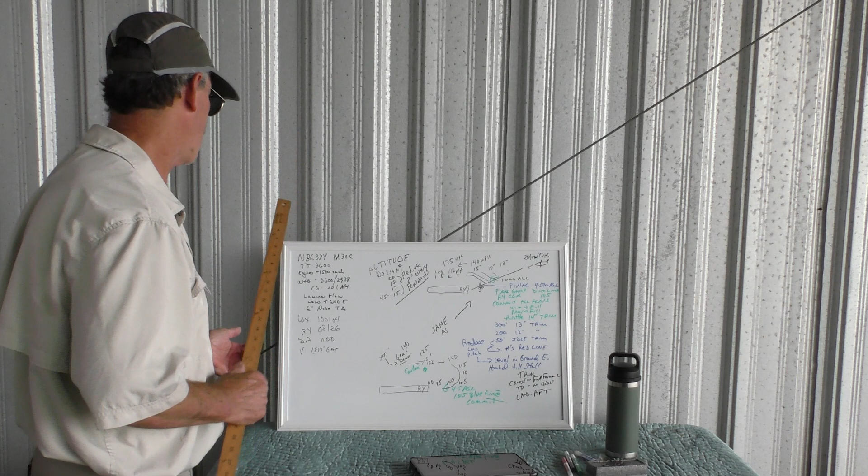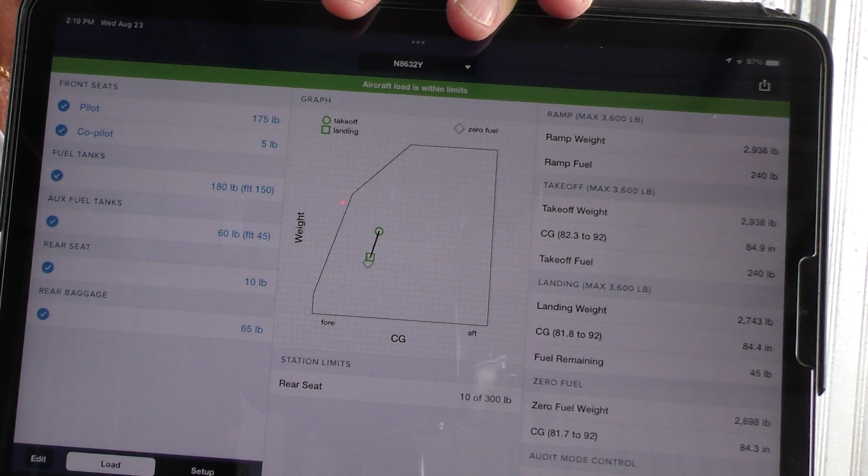The weight and balance, for others that might be interested: my weight, I should have it listed here, 2445 at 82 point something CG is my aircraft. After any major work, I reweigh it. So this is, if we can see on this screen, where I am. I am in the forward 20% of that envelope. So therefore, I am very light because I am 2,938 pounds out of 3,600. I'm over 600 under gross.

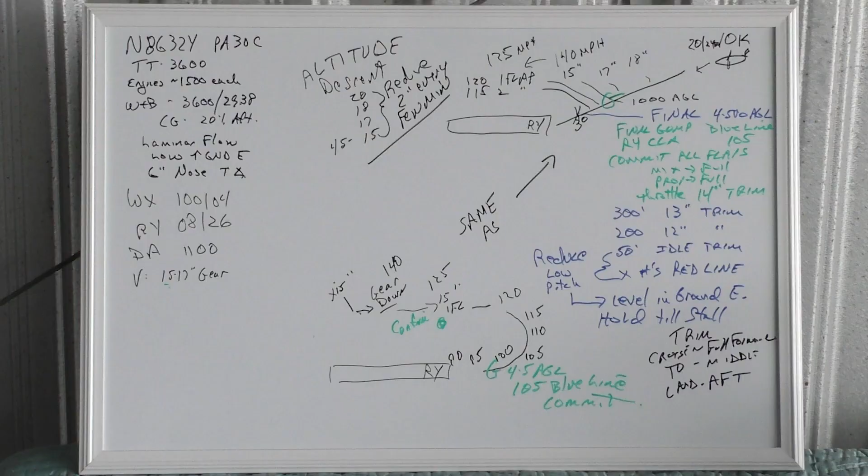I will have to be thinking on my approach on what am I going to do. This is going to help me point. I'm going to move us a little closer. There you go. Okay, I'm back.

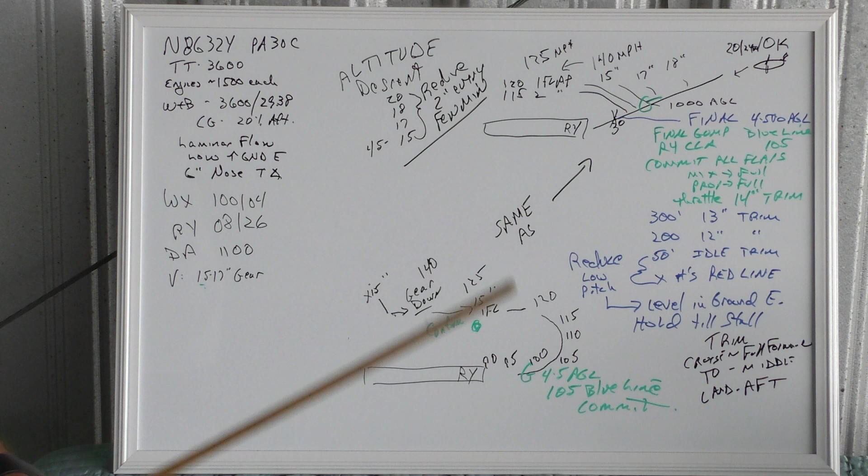I put my ideas down and then we're going to go fly, and hopefully I can demonstrate what I'm trying to talk about. But you have to plan ahead of time. I start off with the weight and balance and how I configure the plane. I also have to understand my wing design and ground effect. This is a laminar flow wing. It is low to the ground, and I will float, especially if I'm light. That's where people get the difficulty, so they will not use flaps, whereas I'd rather use flaps and land extra slow when my stall horn goes off.

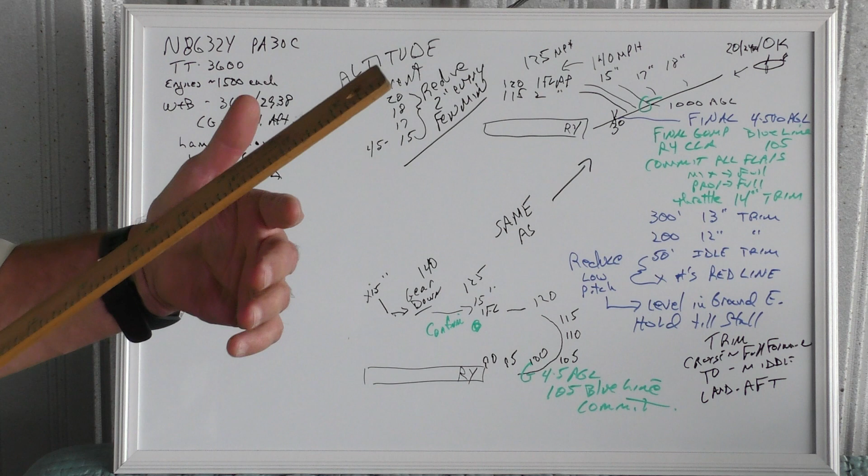The 6-inch nose wheel versus the 4-inch nose wheel also makes a difference, and I have to be aware of that. The winds, density altitude: we're almost at sea level, 53 feet. The winds are 100 at 04. We have runway 08, which I'll be using. They're fairly calm today. The density altitude is 1,100. It's in the upper 80s, and it's a little bit hot.

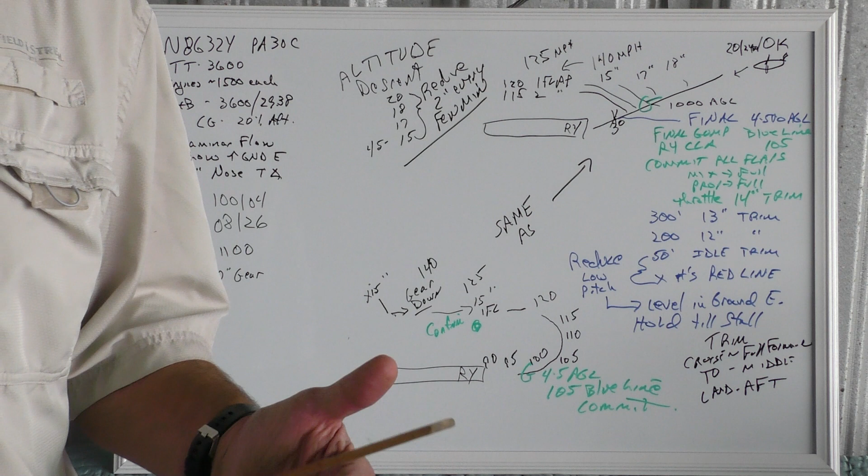So my gear speed: when I come into the pattern, about to capture a glide path, I have to know what speed I set my plane at so that I get within those gear speeds. Normally it would be between 15 and 17 inches, but on a light aircraft like I have, I'm going to say 15 inches is going to get me there. So I have to think about my speeds and my settings prior to the approach. So my approach, let's say I'm going to start this very high.

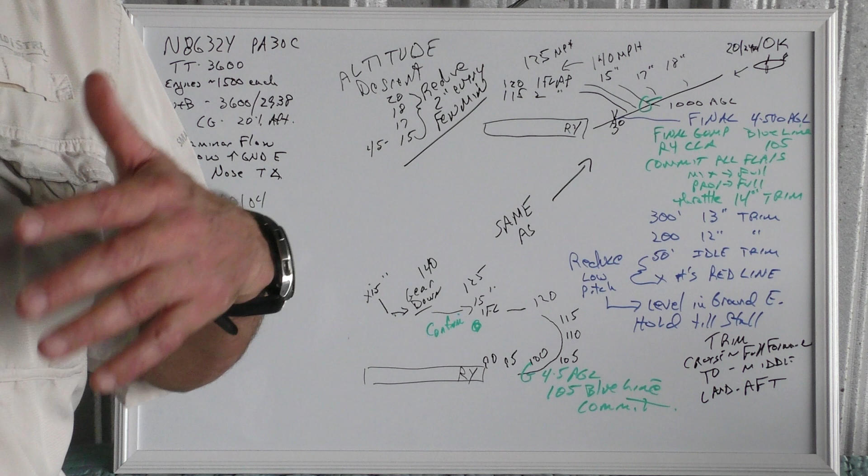Up here I might be at 10,000 feet, cruising along wide open throttle, 2,400 RPM, and I'm leaned out. How do I lean out? I have a JPI. I usually find my peak EGT prior to anything, and then I know that when I take off, I will climb out at 200 rich of peak, monitoring my cylinder head temps and varying accordingly. But at altitude, I have to decide, do I want to do rich of peak, 75 degrees, or do I want to fly at peak or lean of peak?

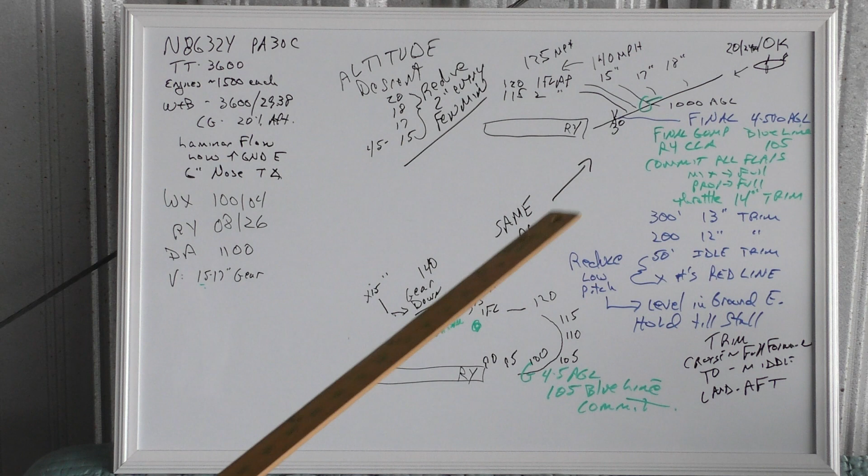In order to descend, I'll pull my power back to 20 inches and I'll start going down, 500 feet per minute. I'll leave my props at 24, and I'll stay lean, cowl flaps are shut. Somewhere along that descent, I want a constant descent, constant angle. I might want to start decreasing my manifold pressure, and I like to do it slowly, 2 inches at a time, every so often. So at some point, I'll pull the power to 18 inches, 17 inches.

But when I am about to be in the pattern or about to capture my procedure turn or glide, I'm going to want to get down to that gear speed 3 miles prior to when I need to dump my gear, or less. So 15 inches. I will then slow up to 140 miles an hour, which is my gear speed. 150, they say.

I like to be a little slower. A trick is that if I'm not, I'll pull the power back a little bit and hold the nose up, or I'll hold the nose up. So we have tricks to do that.

Coming down, drop the gear. It might be glide slope intercept. It might be at, here I am, I'm on downwind, I'm in the pattern. So then I want to slow up. When I drop the gear, the plane will naturally slow up to 125, top of the white arc. If it doesn't, I have to say why.

I fly it by the numbers, I set it up, and I expect the performance to be as gear's down. I should slow up to 125. At that point, I'm power at 15, 125. I've beamed the numbers. I'm going to give it a notch, a flap of some sort. I look out the window and verify. I want to slow up to 120.

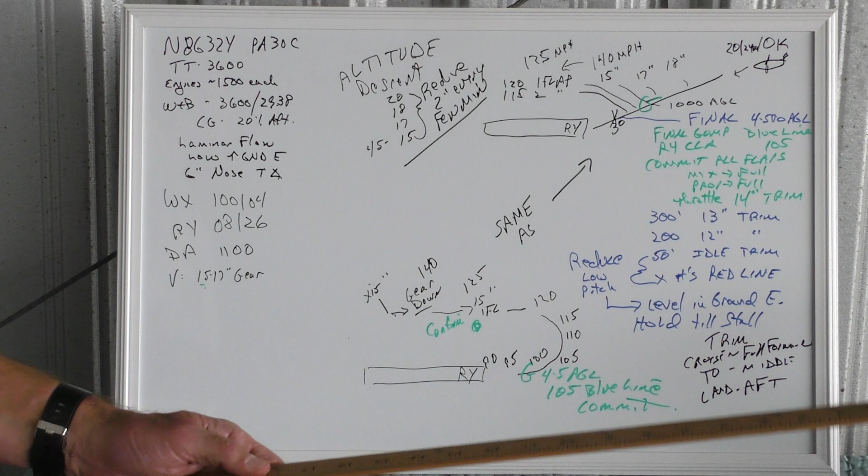On my base leg, 2 notches of flaps. They're not notches, electric. So I look out the window to say, how do I like it? I say high or low, fast or slow. And I want to slow up to 115. When I turn final, I want to be my final 400 or 500 feet AGL.

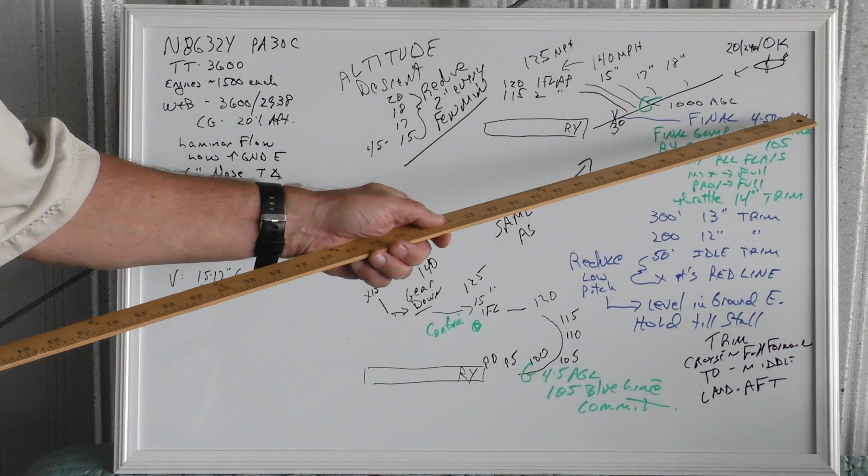I do my final GUMP check. I make sure my gear is down. I make sure the runway's clear. I'm holding blue line till I commit to landing. At that point, I'm going to want to say, runway's clear, GUMP check's done. I am committing myself to landing. I will then dump all the flaps, mixture full,

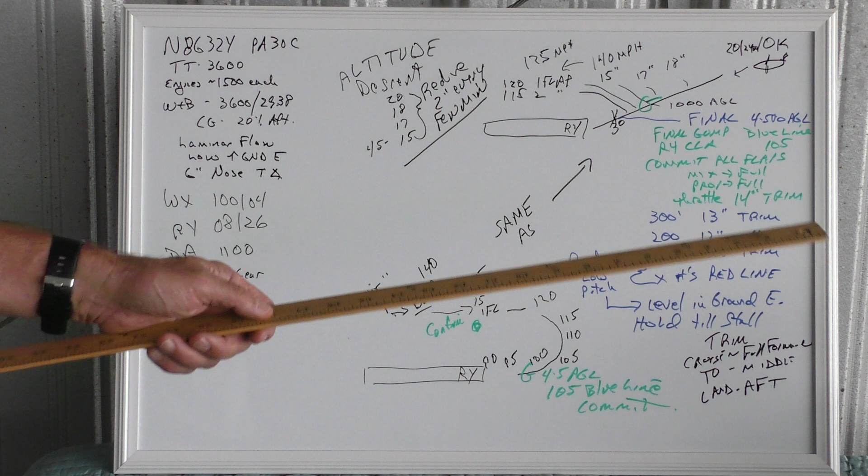props go full, and I got to pull the power back because now I got to slow up from the top blue line. I have to come over the numbers at that speed that I thought of. So I then power back to 14 inches. I give it 1 up trim. At 300 feet, 13 inches, up trim 1, 200 feet, 12 inches, up trim 1.

I have to decide on the energy of the aircraft. The energy, the movement in the engine, that's kinetic energy, and how high I am, that's potential energy. The sum of all the energy, how's it feel in my butt? How's it feel making it to the runway? Am I fast? Am I slow? What are the winds like? Do I have a good headwind or do I have a tailwind?

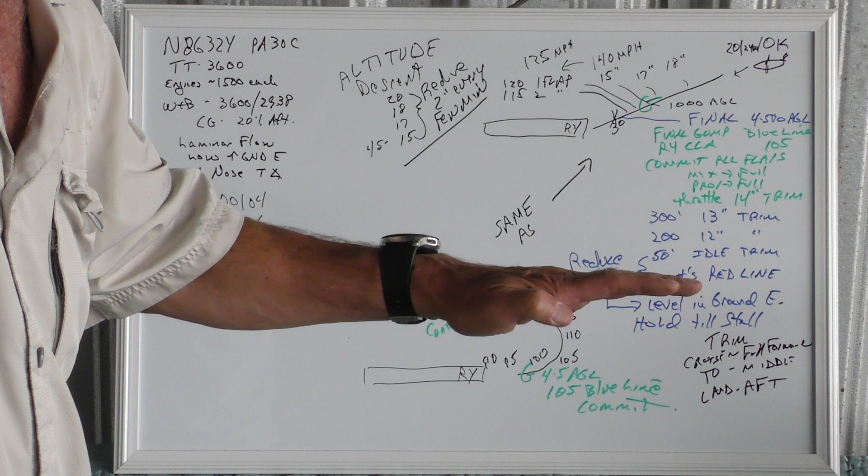So I have to think of all these things, and when I feel like it's good, I go to idle. I make sure I'm 100% back to idle, around 50 feet. My descent is coming in, and at some point I do have to bring the nose level, ground effect. Not this, but the faster you are, the smoother this has to be. And there you go, I hold that over the numbers. I'm level, I'm in ground effect.

I want to try and hold it off until she stalls. If I'm very light, like a day like today, she might balloon. I have to be ahead of her every second. So hold her until she stalls.

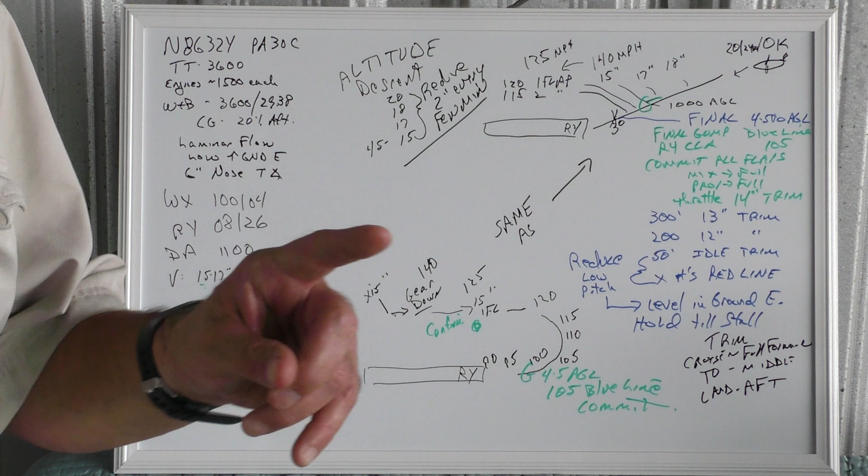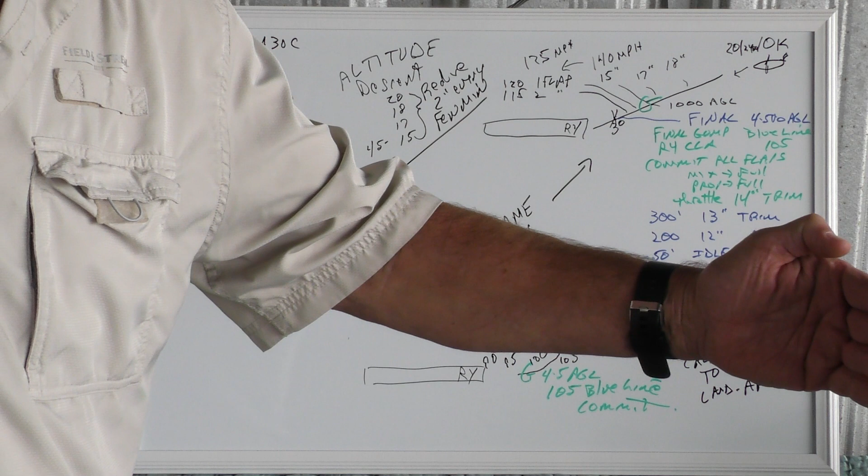So my trim, people misuse their trim. When I'm in cruise and I'm on step, my trim, here's that wheel above head for those Comanche drivers, my trim on top is fully forwards in cruise. When I take off, it's halfway at the takeoff mark. But when I land, that trim should be coming aft.

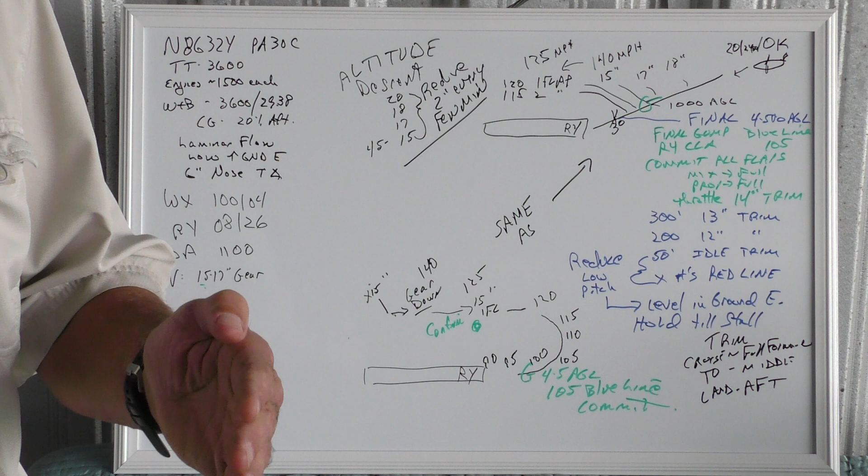Aft, how far? All the way, because I'm trimming for the airspeed that I wish the plane to fly, and that is at the bottom of the white arc. If I have to do a go around, I can deal with that. That's another story. But the trim should be fully aft.

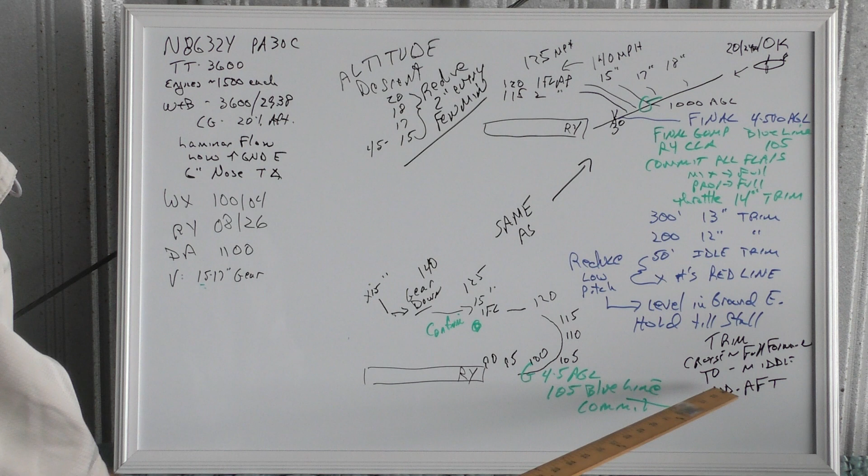The other thing is when I'm in the pattern, depending on how wide my pattern is, you have to fly a consistent pattern. You have to fly it by the numbers. So when I'm coming in on a 45, I'm at 15 inches, watching my gear speed, watching the runway, watching the winds. And at that point, 15 inches, I turn downwind, midfield downwind.

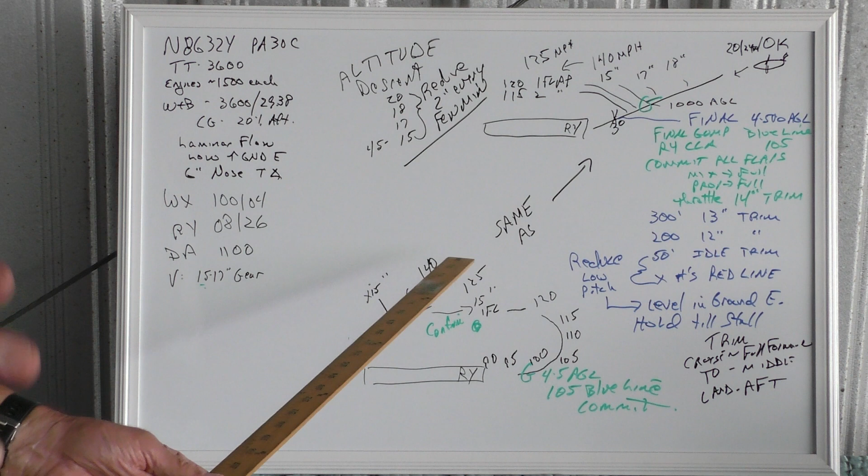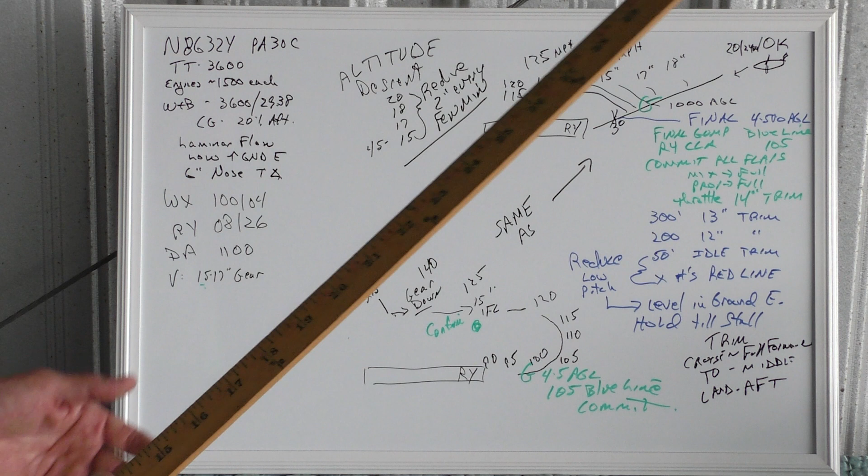I should be getting my gear down. I want my gear down. It takes 7 seconds. By the time I am at the numbers, I got to confirm my gear is down, or maybe I should go around, climb to 2,000 and figure out why didn't my gear go. So the gear went down.

I slowed up from 140 to 125. I'm going to abeam the numbers, power to 15. I put 1 notch of flaps. I hold the nose level for a couple seconds. I allow the plane to decelerate. I'm going to decelerate 5, maybe 10. I'll be about 120, and I'm starting to come down at about 120.

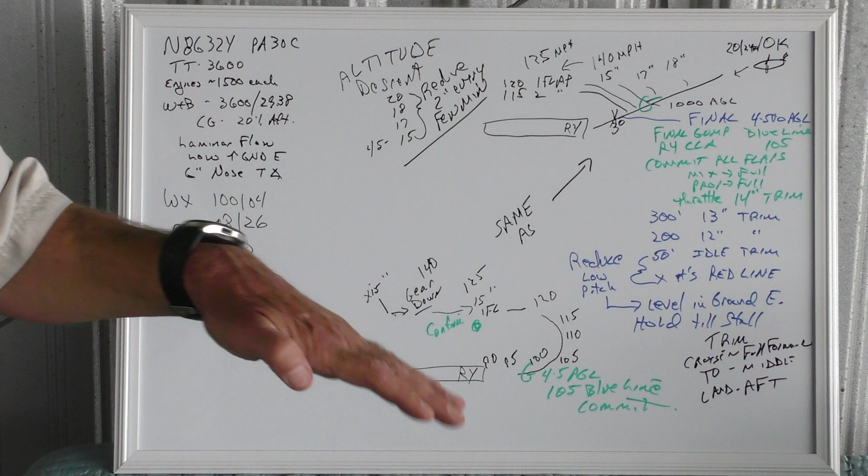I do not fly these big square patterns. The nose will have this continuous pitch from when I start down till I go to ground effect. So I have to hold that continuously and not hold her level on the base and then dive on the final. I want a continuous angle all the way around, curving in, just like if I was coming down a glide slope. There's really no difference to me.

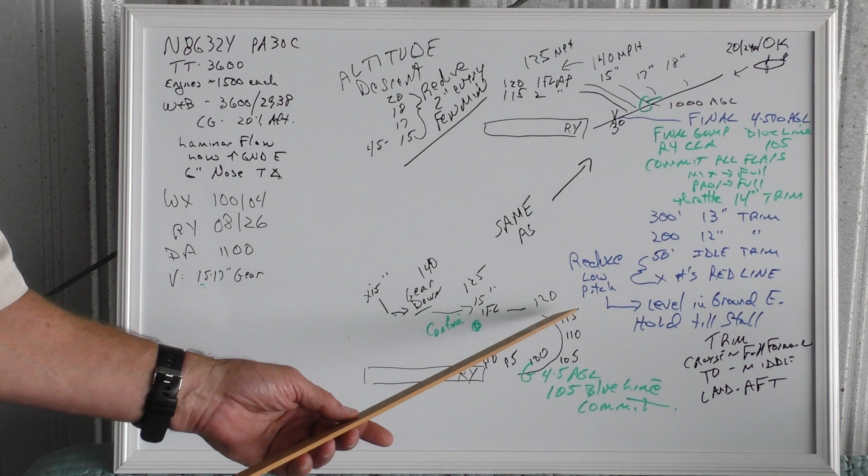On base leg, I should be getting to about 115. I should be configuring. I should be trimming. And as I turn final, I should be hitting 105 at 400 or 500 feet on final. Lined up with the runway, final GUMP check, gear's down.

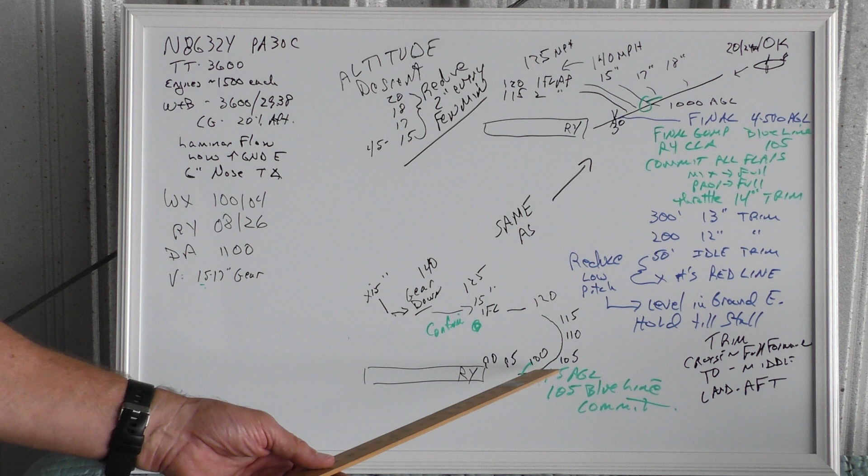And if I commit to landing, everything's good to go. Full flaps, if I choose. And I'm going to go mixture, full rich, depending on my elevation. Props, full forwards, depending on the noise I want to make.

And I'm bringing it right to that ground effect. That ground effect, that's our key. That last 50 feet is where it all happens, by getting your trim and speed right, coming over the numbers at the right pitch attitude, and the energy. You got to feel it in your pants.

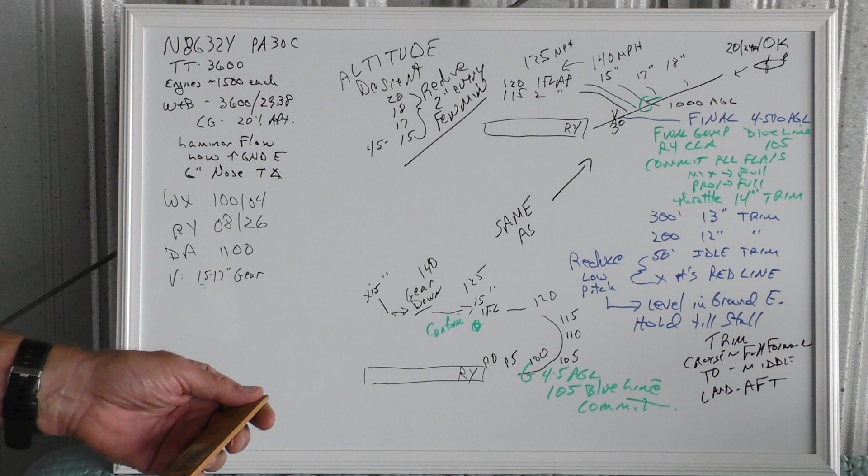We're going to go fly. Let's go see what this sounds like, and hopefully I don't have to take 20 takes and we get this done. Okay, see you up there.

Lights. Got a green. South Jersey, twin back taxi 26.

Gear down, I'm staying down. Gear up. Identify the bad engine and verify the bad engine. Feather the bad engine. Clean up. Get up. Come back around. Fly the plane, fly the plane. Checklist is done.

Quick app check. I see no one coming in. He didn't tell me which way he was going, but too hot to sit on the runway.

My trim is set according to the weight. I might want to get airborne sooner than 90-ish. Any questions? Great. I got G, B, U, lights, time, BLTB, GUMP check.

South Jersey, Twin Comanche, departing runway 26 northeastbound. Lined up. Marking runway 1, lined up again. Let's get on the center, get the nose wheel straight, power back, 1500. Gauges are good, windsock check.

1500. Let's roll. Smoothly release the brakes. Stay on the center line, don't give up an inch. Don't give up an inch.